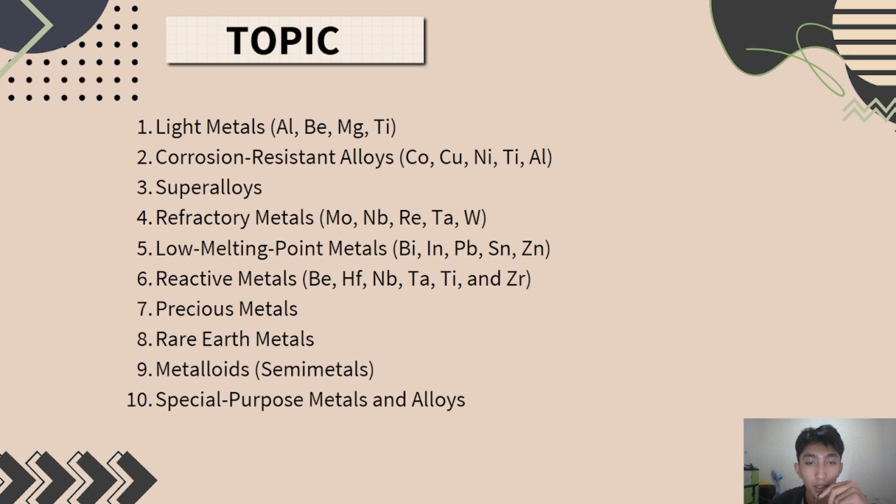Okay, this topic: first is light metals, two corrosion resistant alloys, next is superalloys, refractory metals, low melting point metals, reactive metals, precious metals, rare earth metals, metalloids, special purpose metals and alloys. Okay, the latter approach where several non-ferrous metals are grouped into the following key alloy categories.

The first is light metals like aluminum, beryllium, magnesium, and titanium. Two is corrosion-resistant alloys like cobalt, copper, nickel, titanium, and aluminum. Three is superalloys: nickel, cobalt, and iron-nickel. Four is refractory metals like molybdenum, niobium, rhenium, tantalum, and tungsten.

Five is low melting point metals: bismuth, indium, lead, tin, and zinc. Six is reactive metals: hafnium, titanium, and zirconium. Seven is precious metals like gold, silver, platinum, palladium, iridium, rhodium, ruthenium, and osmium. And next is rare earth metals, and finally semi-metals, also known as metalloids.

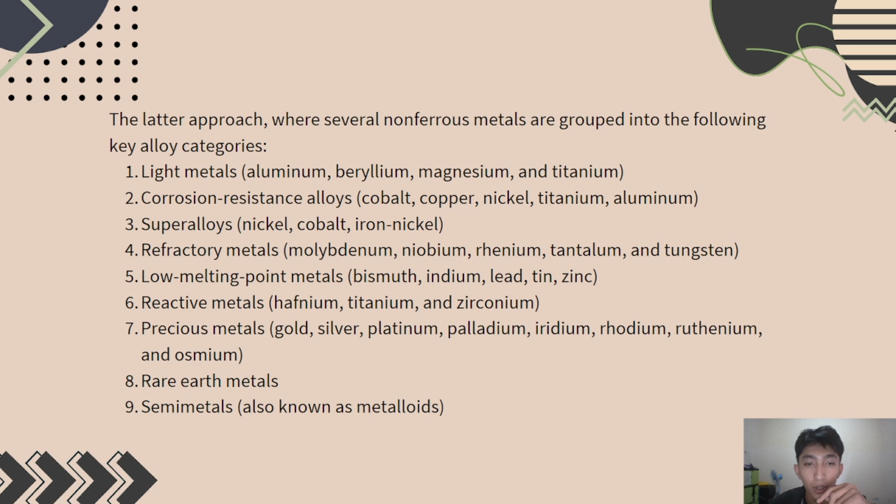Next is light metals. Light metals including aluminum, beryllium, magnesium, and titanium are characterized by their relatively low density and high strength-to-weight ratio. This property makes them valuable in various industrial applications, especially in the aerospace, automotive, and electronics industries. Here's a brief overview of each.

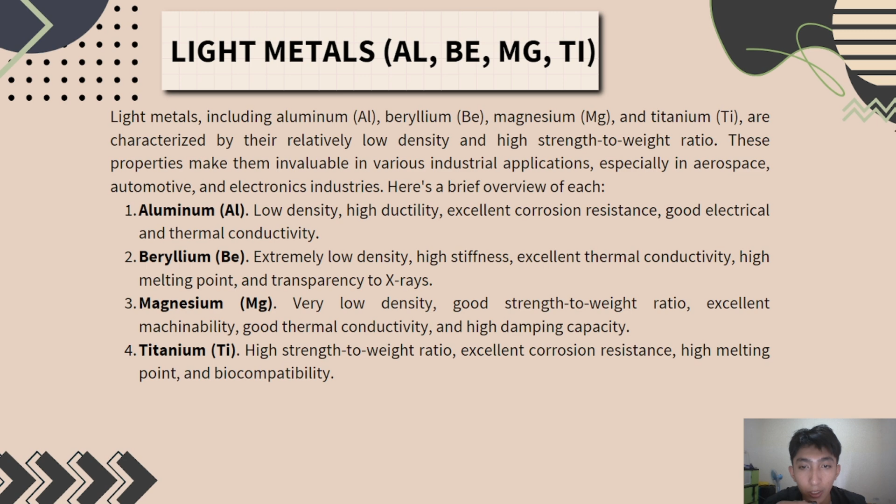The first is aluminum: low density, high ductility, excellent corrosion resistance, good electrical and thermal conductivity. Two is beryllium: extremely low density, high stiffness, excellent thermal conductivity, high melting point, and transparency to X-rays. Three is magnesium: very low density, good strength-to-weight ratio, excellent machinability, good thermal conductivity, and high damping capacity. Four is titanium: high strength-to-weight ratio, excellent corrosion resistance, high melting point, and biocompatibility.

Next is corrosion resistant alloys. First is cobalt. Cobalt is used as an alloying element in alloys for various applications such as permanent and soft magnetic materials, superalloys for creep resistance at high temperature, hardfacing and wear resistant alloys, corrosion resistant alloys, high speed steel, tool steel and other steels, cobalt based tool materials, electrical resistance alloys, high temperature spring and bearing alloys, magnetic alloys, special expansion and constant modulus alloys, and finally biocompatible material for use in implants or dental material.

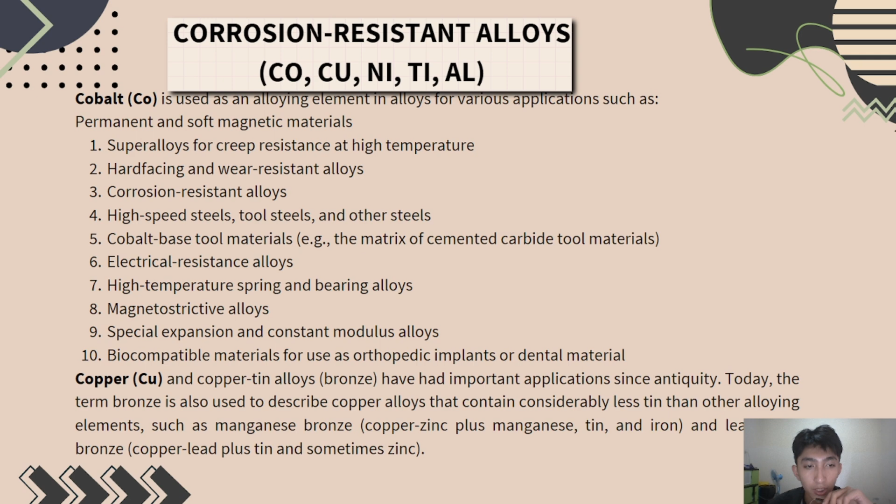Next is copper. Copper and copper-tin alloys, or bronze, have had important applications historically. Today, the term bronze is also used to describe copper alloys that contain considerably less tin than other alloying elements, such as manganese bronze and leaded tin bronze. Next is nickel. Nickel alloys are very important to industries that deal with aggressive chemicals and high temperature conditions. Nickel alloys are also among the few metallic materials able to cope with hot hydrofluoric acid.

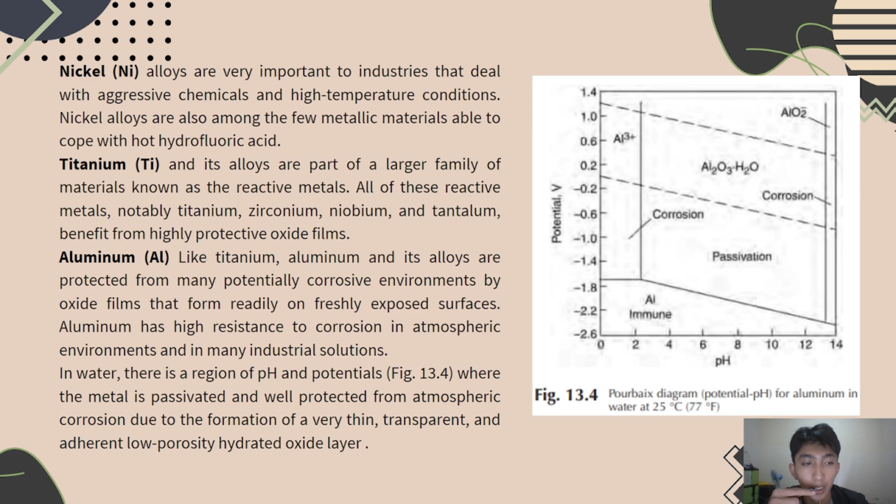Next is titanium. Titanium and its alloys are part of a large family of materials known as the reactive metals. Next is aluminum. Like titanium, aluminum and its alloys are protected from many potential corrosion influences by oxide films that form readily on freshly exposed surfaces. Aluminum has high resistance to corrosion in atmospheric environments and in many industrial solutions. In water, there is a region of pH and potential, like the Pourbaix diagram for aluminum in water, where the metal is passive and well protected from corrosion due to the formation of a very thin, transparent, low-porosity hydrated oxide layer.

Next is superalloys. Superalloys are generally used at temperatures above 540 degrees Celsius. They were initially developed for use in aircraft piston engine turbosuperchargers. Current applications include aircraft gas turbines, steam turbine power plants, reciprocating engines, metal processing, medical applications, space vehicles, heat treating equipment, nuclear power systems, chemical and petrochemical industries, pollution control equipment, metal processing mills, coal gasification, and liquefaction systems.

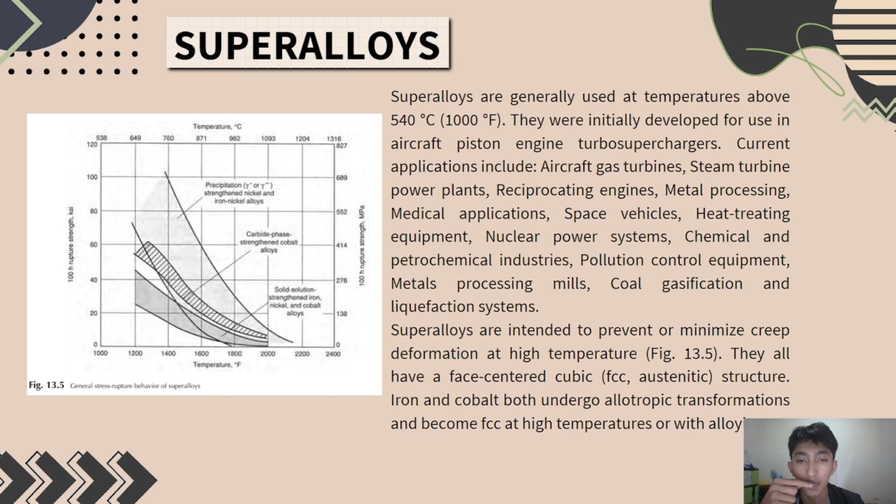Superalloys are intended to prevent or minimize creep deformation at high temperature, like the picture of general stress-rupture behavior of superalloys. They have a face-centered cubic, or FCC, austenitic structure. Iron and cobalt both undergo allotropic transformation and become FCC at high temperature or when alloyed.

The next is refractory metals. The first is molybdenum. Molybdenum has a relatively high melting temperature of 2610 degrees Celsius, along with a high modulus, good creep strength, and retention of mechanical properties at high temperatures. The next is niobium. In addition to its high melting point, niobium is used for its combination of relatively light weight and retention of high strength at service temperatures ranging from 980 to 1205 degrees Celsius. Niobium alloys are also used to impede the passage of neutrons in nuclear applications.

Next is rhenium. The properties of rhenium are generally similar to those of molybdenum and tungsten. Its melting temperature of 3180 degrees Celsius is the second highest among the refractory metals.

The next is tantalum. Tantalum has a melting point of 2996 degrees Celsius and high resistance to corrosion, including corrosion in body fluids. The major use for tantalum is as a powder in electrolytic capacitors, or devices that store electrical charge when voltage is applied.

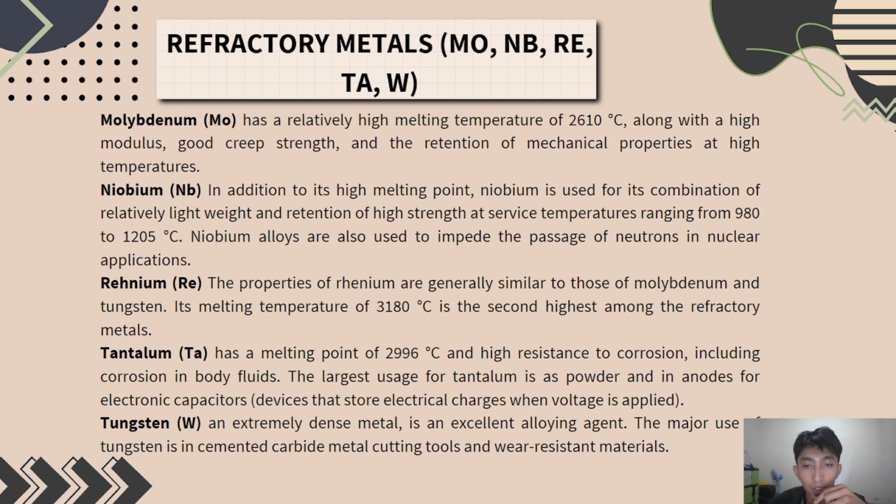Okay, the next is low melting point metals. First is bismuth. Bismuth is brittle, easy to cast, and not readily formed by standard working methods. Its melting point is lower than that of tin-lead solder. Bismuth is one of the few metals to increase in volume upon solidification.

Next is indium. Indium is one of the softer metals, and highly plastic, or it can be deformed in compression almost without limit. It has low tensile strength and hardness and is stable in dry air at room temperature.

Next is lead. The properties of lead, generally low melting point, corrosion resistance, malleability, unusual electrical properties, and the ability to form useful alloys and chemical compounds, combined with its ready availability and relatively low cost, make it a unique material for solving a variety of problems.

The next is tin. Tin, one of the first metals known to humans, is non-toxic, soft and flexible, and suitable for cold rolling. Tin resists corrosion, making it an ideal coating for other metals. The next is zinc. Zinc has a relatively low melting point of 420°C, resists corrosion, is ductile and malleable, and is highly soluble in copper. As a coating, zinc provides corrosion protection for iron and steel.

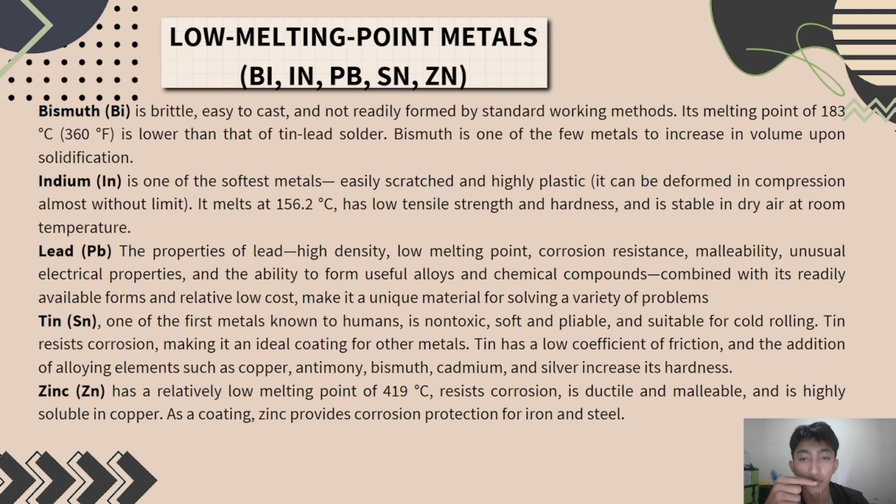Okay, the next is precious metals. The first is gold. Gold is extremely soft, ductile, and easy to deform. Chemically, pure gold is 99.9% pure, and higher purity is commercially available. Resistance to oxidation is an outstanding property. Its yellow color is maintained in air or when heated.

Next is silver. Among metals, pure silver has the highest thermal and electrical conductivity. Next to gold, it is the most ductile. Silver is also one of the most corrosion-resistant metals. Representative uses include electroplate, wire, sterling ware, jewelry and art, photography, mirrors, batteries, bearings, coins, and catalysts.

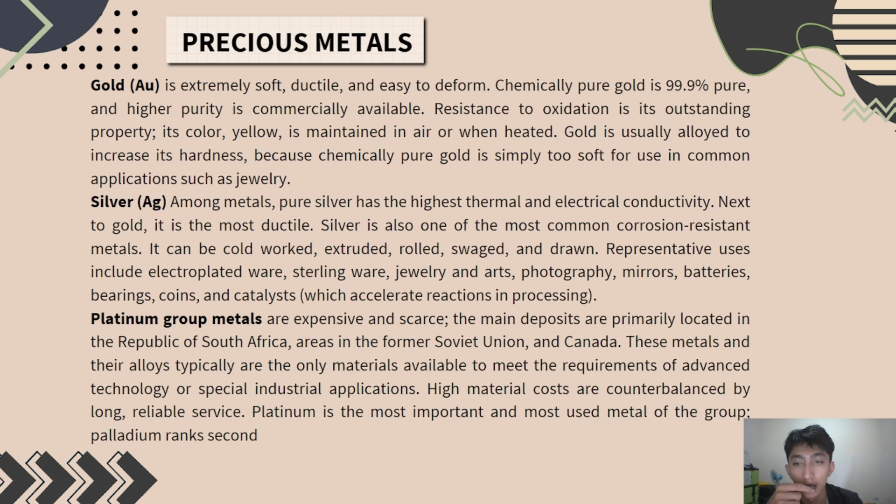The next is platinum group metals. Platinum group metals are expensive and scarce. The main deposits are primarily located in the Republic of South Africa, areas in the former Soviet Union, and Canada. High material costs are offset by long, reliable service. Platinum is the most important and most used metal of the group. Palladium ranks second.

The next is rare earth metals. The term rare earth describes metals that are not all rare. The name derives from the oxide minerals in which they were discovered. The family has these members: scandium, yttrium, lanthanum, cerium, praseodymium, neodymium, promethium, samarium, europium, gadolinium, terbium, dysprosium, holmium, erbium, thulium, ytterbium, lutetium.

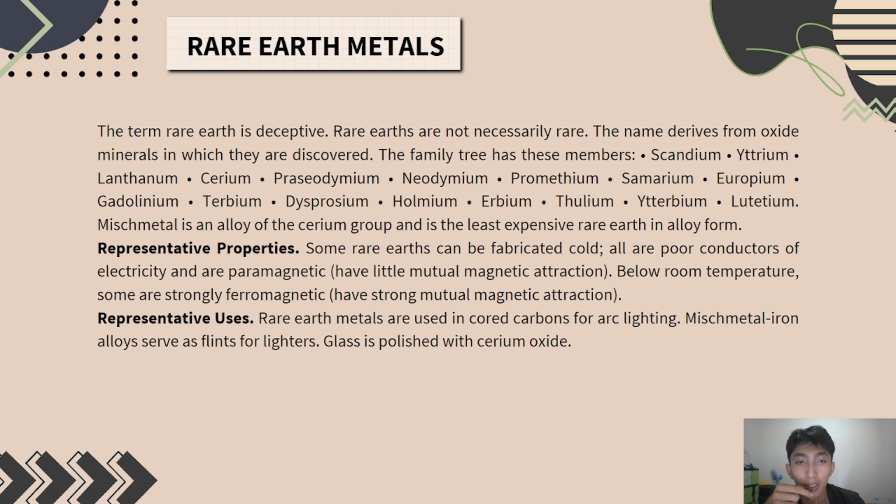Misch metal is an alloy of the cerium group and is the least expensive rare earth in alloy form. Next is representative properties. All rare earths are poor conductors of electricity and are paramagnetic. Below room temperature, some are strongly ferromagnetic. Next is representative uses. Rare earth metals are used in carbons for arc lighting. Misch metal-iron alloys serve as flints for lighters. Glass is polished with cerium oxide.

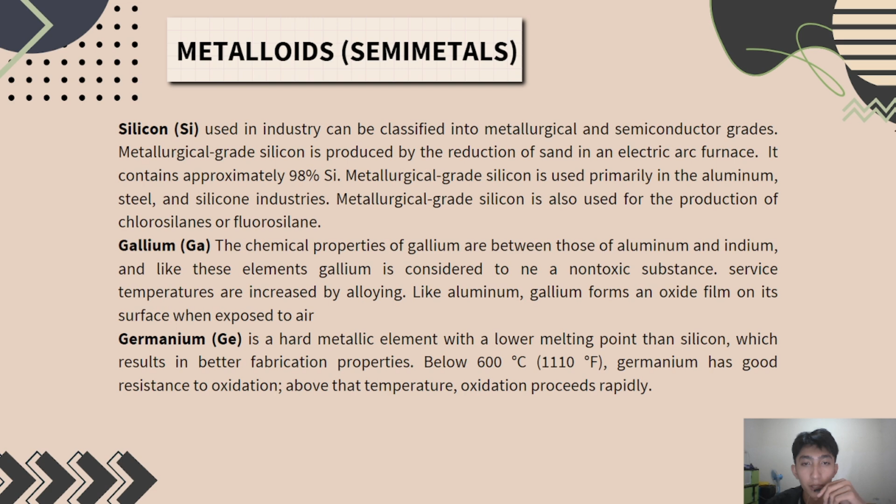Okay, the next is metalloids or semi-metals. The first is silicon, used in industry can be classified into metallurgical and semiconductor grades. Next is gallium. The chemical properties of gallium are between those of aluminum and indium, and like these elements, gallium is considered a non-toxic substance. Then next is germanium. Germanium is a hard metallic element with a lower melting point than silicon, which results in better fabrication properties.

Next is special purpose metals and alloys. The first is uranium. Uranium is a moderately strong and ductile metal that can be cast, formed, and welded by a variety of standard methods. Next is vanadium. Vanadium is chemically active and closely related to niobium, tantalum, titanium, and chromium. Vanadium is soft, ductile, and strong, and has good resistance to atmospheric corrosion and to hydrochloric and sulfuric acid environments.